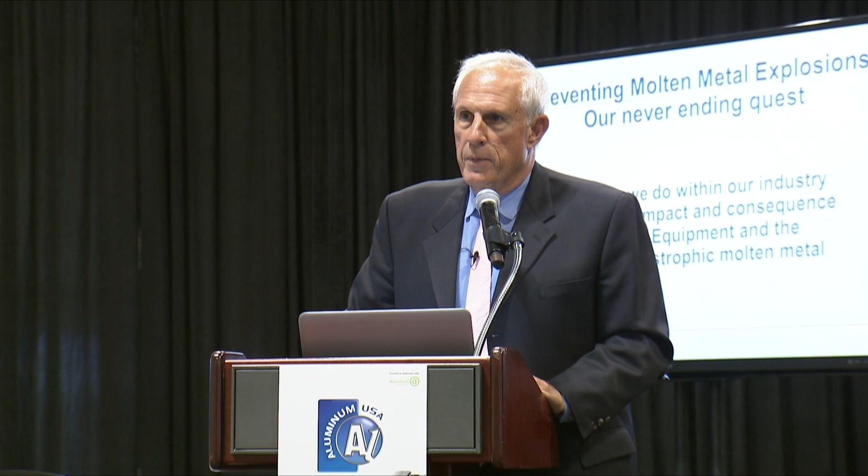Yeah, I think that's very true, and I'll explain. 50 years ago, this event happened. You can see the massive destruction at the casting complex. 4 people were killed instantly, 1 later. A catastrophic event. So you ask yourself, can that happen today?

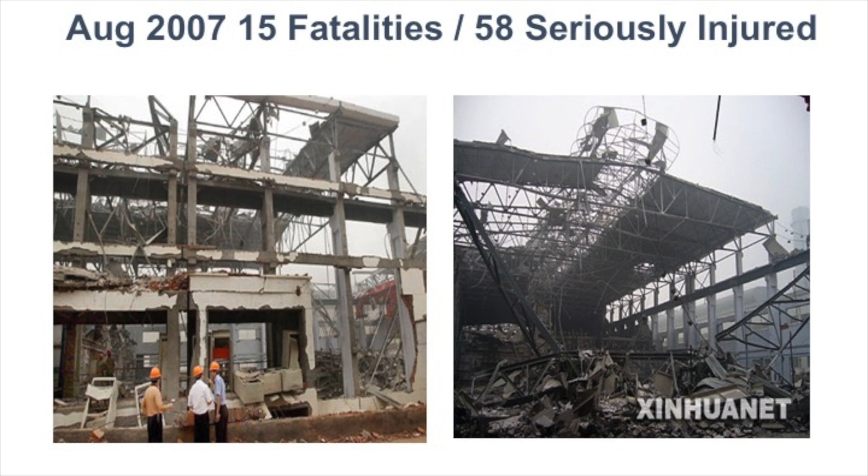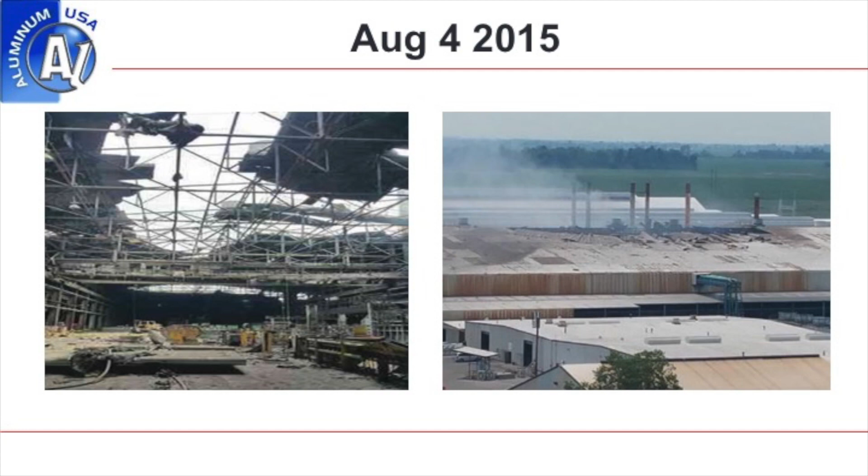Just 10 years ago, 15 cast house workers were killed and another 58 seriously injured. More recently, August 4th, 2015, a massive explosion at a cast house. You can see the massive structural damage. Fortunately, no one was injured significantly and no deaths in this event, but you could see the potential.

And then just over a year ago, another significant explosion without serious injuries, but obviously serious impact to property, equipment, and the business. Fact number 2: preventing molten metal explosions is the Aluminum Association's number 1 safety priority.

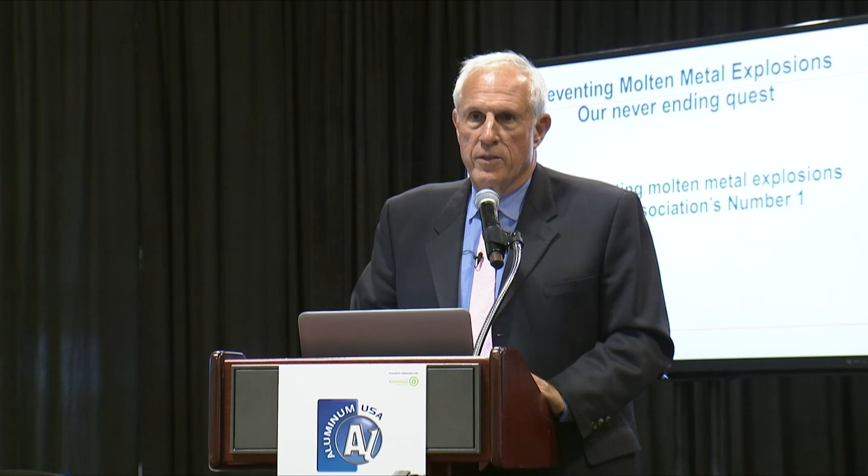Tremendous focus, effort, and energy is applied by the association in pursuit of explosion prevention. So within the association, that's the number 1 safety priority, and it's an absolute must.

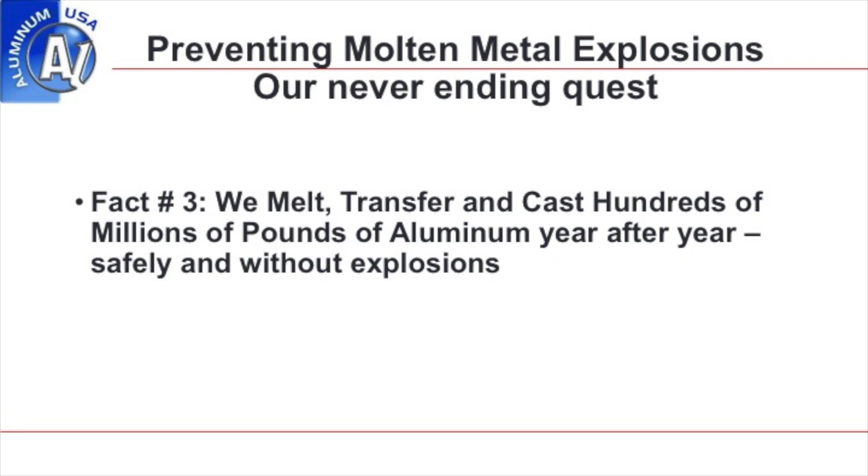Fact number 3: we melt, transfer, and cast hundreds of millions of pounds of aluminum year after year safely and without explosions. I'll give you an example.

This example shown is one member company's data, but is really representative of almost the entire industry. We'll share the raw data for explosions shortly, but this slide represents one company's data over a 10-year period, looking at millions of pounds produced — in other words, exposures considered here. As you can see by applying exposure, pounds cast, explosions are indeed rare events.

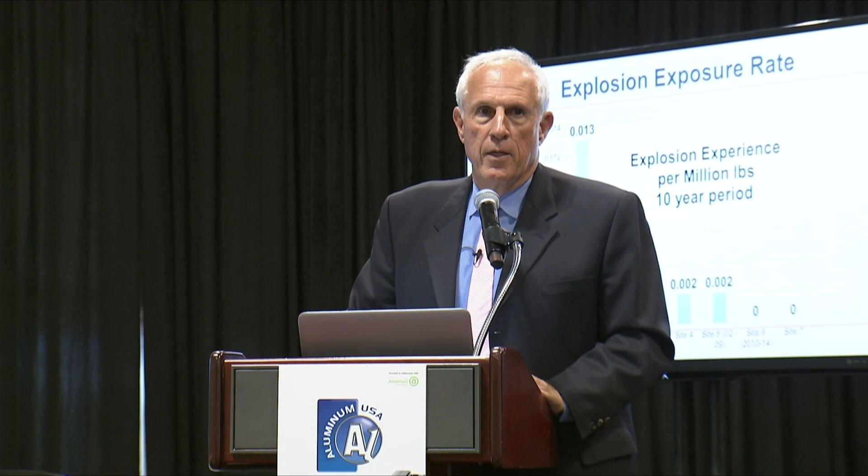The average explosion rate of this company is 0.003 per million pounds cast. So even though we have these significant events with severe consequences, the industry as a whole, when you think about pounds cast per million pounds cast, is significantly low.

Another situation we have, of course, is with injuries. In this case, it's the OSHA recordable rate. If you look at the blue line, that's all manufacturing within the United States. The red line is the Aluminum Association member companies. So in this 12-year period, you can see that we've reduced injuries by 37%.

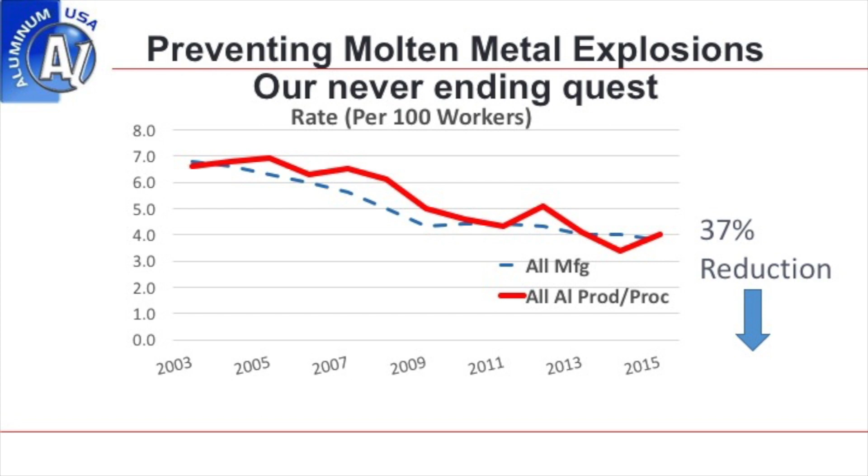Fact number 4: industry experience tells us that molten metal explosions are infrequent events within the industry, but sometimes with severe consequences. I think you can see by the data I just showed, and the 3 explosions in the photos, that statement is absolutely true.

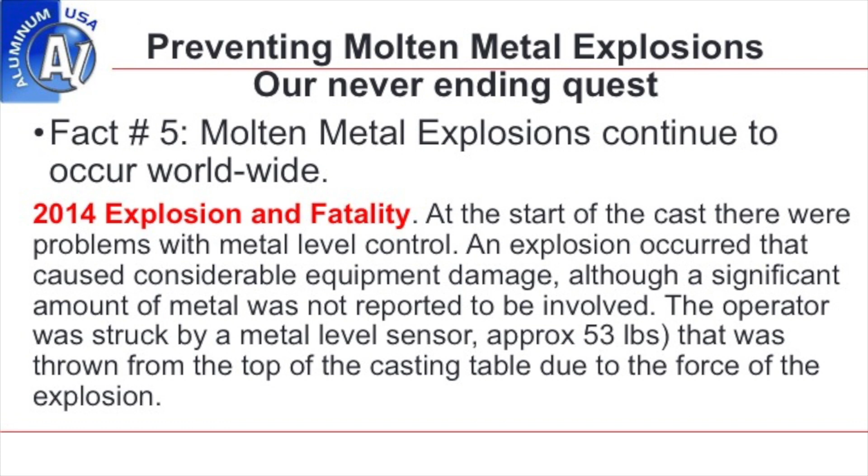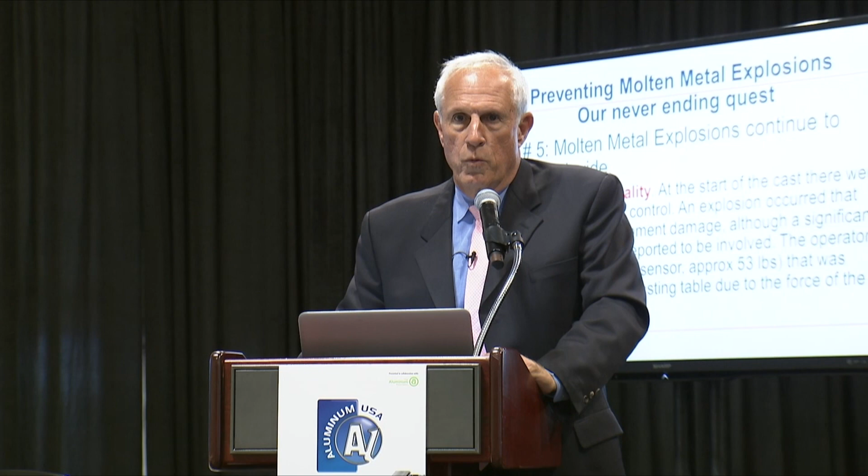Fact number 5: molten metal explosions continue to occur worldwide. The last fatality that we had from a molten metal explosion was in 2014. Before that, 2009 — so we went 5 years without a fatality within the industry related to a molten metal explosion. In this particular case, the force of the explosion sent a piece of equipment toward the operator with such force that it resulted in a fatality.

The point I want to make here, because we're going to talk about it in a little bit, is that it was the start of a cast. So that's important when we talk about casting and the start of the cast. This event, the last fatality, occurred at the start of the cast.

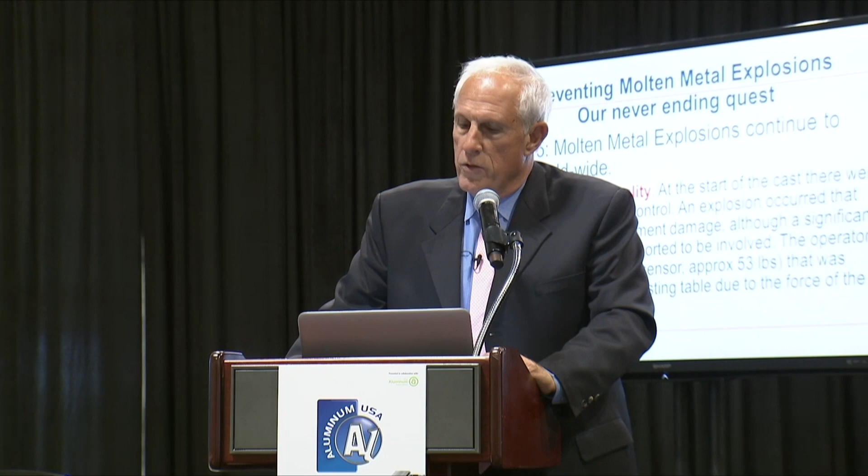Fact number 6: we know within our industry how explosions occur, their causes, why, and how to prevent them. As we move forward in this presentation, I'll be discussing these areas in greater detail.

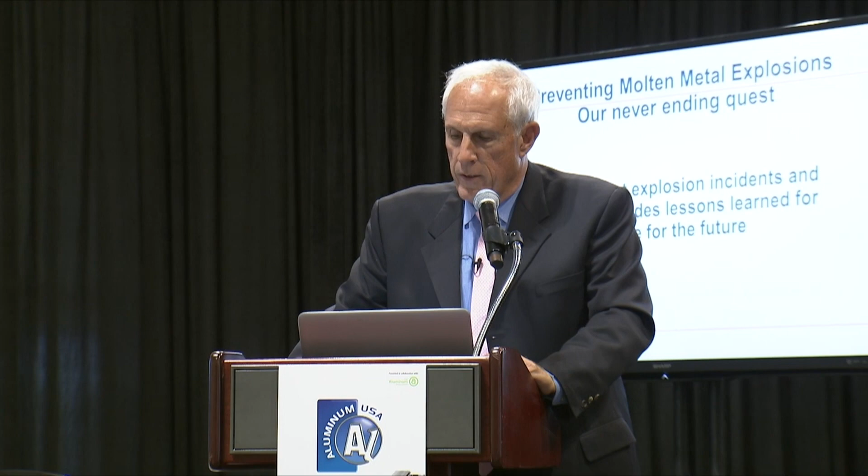Fact number 7: our past explosion incidents and incident data provide lessons learned for today and guidance for the future. As an industry, at our Molten Metal Safety Workshop, we examine past data that allows us to share experiences, learn from them, and create changes, including new internal standards and industry-wide guidelines that will prevent future explosions.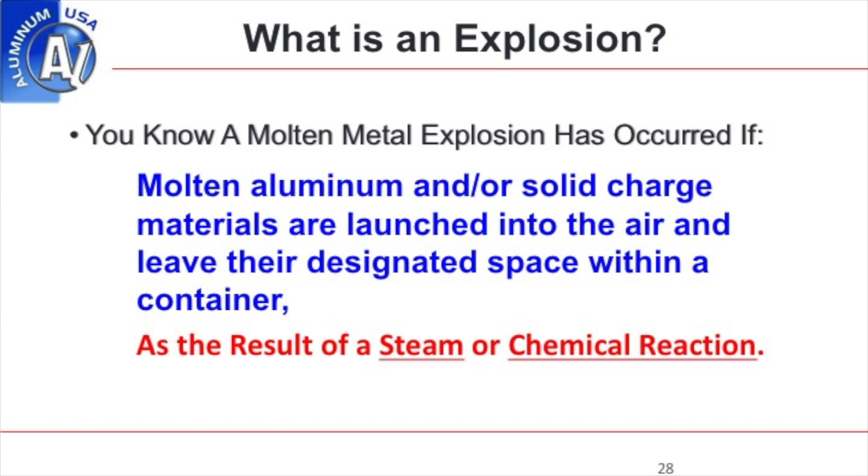So if you think of some of those containers, anybody have any ideas about containers in our cast houses? Furnace, yeah. Drain pans, okay. Yeah, there you go. All those are correct answers.

So when you think of the causes of explosion, we'll talk about steam explosions: water trapped in or under molten aluminum. Also chemical reactions. The first one is really going to be the Force 1 and Force 2, the vast majority. The Force 3 are really going to be that second one, the chemical reactions.

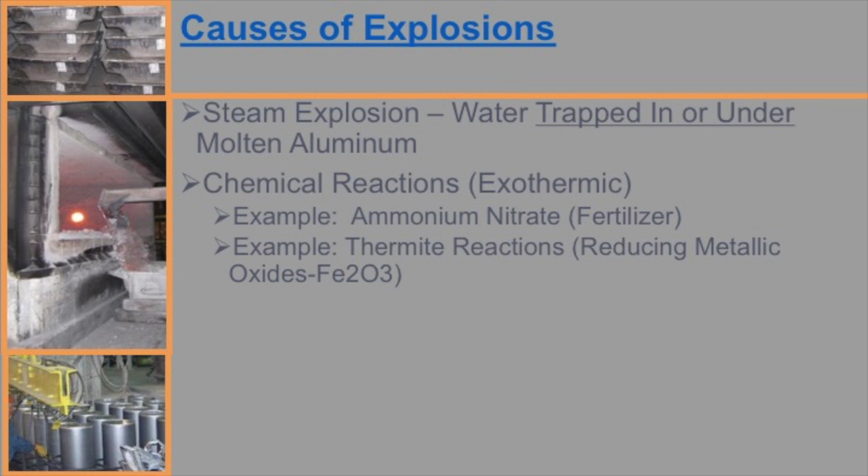And of course we know some of those are caused by ammonium nitrate fertilizer. We know the power of ammonium nitrate. So ammonium nitrate in molten metal is a catastrophic event.

So what causes most molten aluminum water explosions? Steam explosions, water trapped in or under molten aluminum, or exothermic chemical reactions? That's the answer. So most molten aluminum explosions are caused by water trapped in or under molten aluminum.

So this gives you kind of a pictorial view of how that process occurs. Water trapped in or under aluminum superheats. That water rapidly changes from liquid to gas, in this case steam, and expands up to 1,700 times. A steam explosion occurs, spraying molten aluminum in every direction.

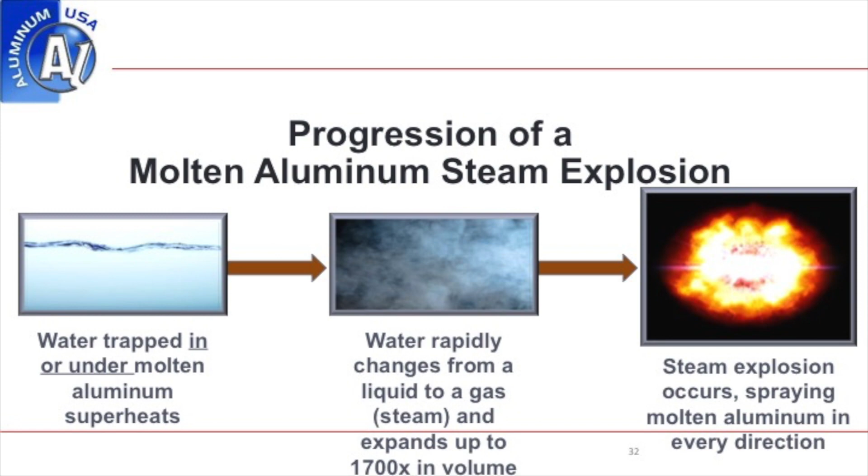It's a steam-caused explosion. What does 1,700 times look like in terms of volume? If you took a marble and expanded it 1,700 times, you get a soccer ball. For some, I know, that's a football, right? Okay.

Anyway, tremendous expansion. What if we have moisture in the sow cavity? What does that look like? Think about that marble in the sow cavity expanding 1,700 times. The pressure's got to go somewhere, right? So you get the concept? Okay.

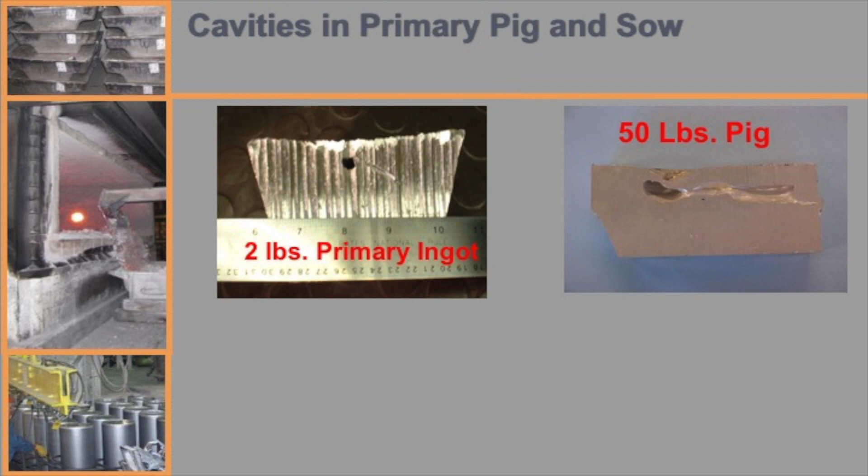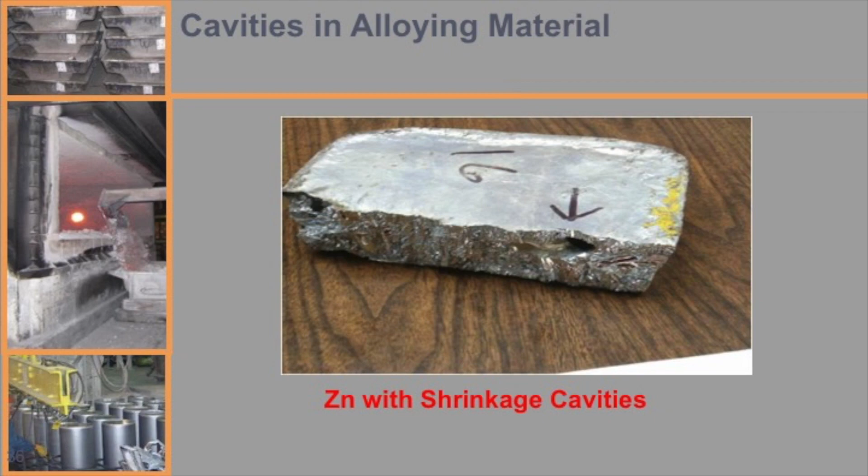So now we're going to talk about cavities that we have to deal with and manage the risk. These are some alloying agents that obviously have cavities and have the potential to contain water, and then convert it to steam if it gets into molten metal. Of course, we have cavities in alloy material too. The same situation can occur.

So again, here's an example. How can water be trapped in or under molten aluminum? We think about a sow with moisture on the surface, or water in a sow in a shrinkage cavity. Which one's going to be more potentially dangerous? Because obviously we know this by experience.

These sows contain up to a gallon of water in one given sow. So think about that 1 gallon of water expanding 1,700 times. This is an important point here because up to this point we really talked about explosions caused by steam, water trapped. The steam-related explosions really account for, and I think I mentioned this, primarily Force 1 and Force 2 explosions.

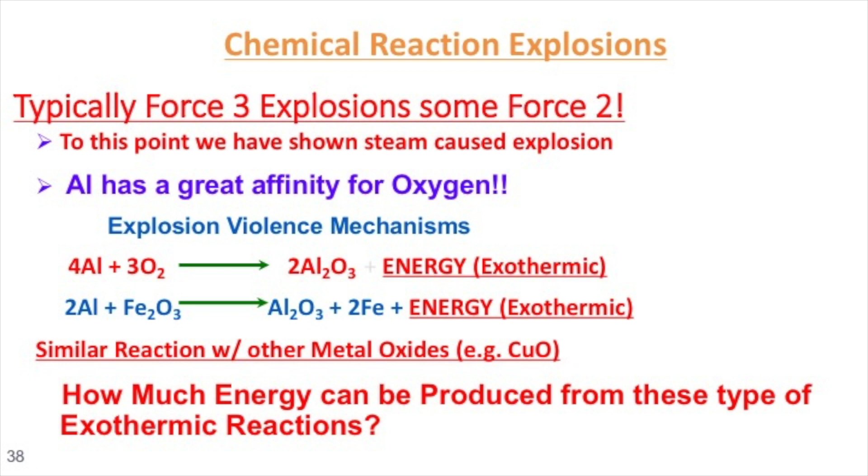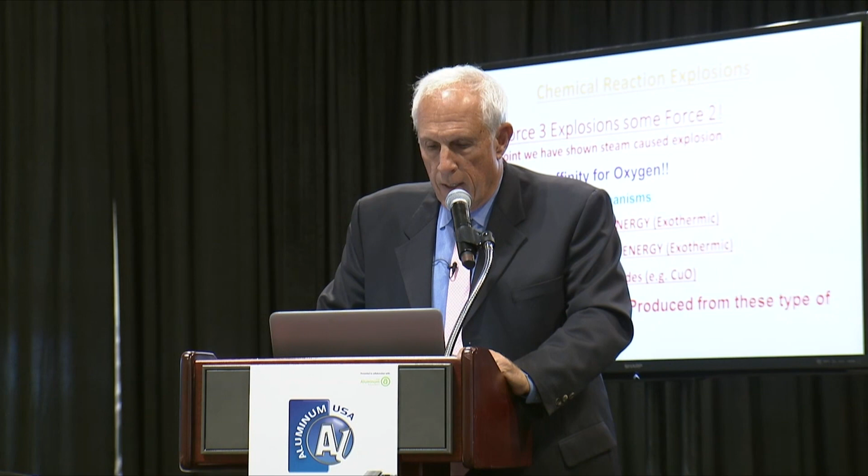However, as we know, aluminum is a very reactive chemical element with a great affinity for oxygen. Just as it requires a large amount of energy to break down the aluminum-oxygen bonds and produce metallic aluminum, that energy will be released if aluminum is able to recombine with oxygen, whether in water or air. So that's this exothermic reaction you see resulting in this.

If you think about it, it's been estimated from a thermodynamic standpoint that the release of energy of 1 pound of aluminum fully reacting with oxygen is equivalent to detonating 3 pounds of TNT. So you get a perspective of how violent that can be if aluminum is able to react with oxygen in either water or air.

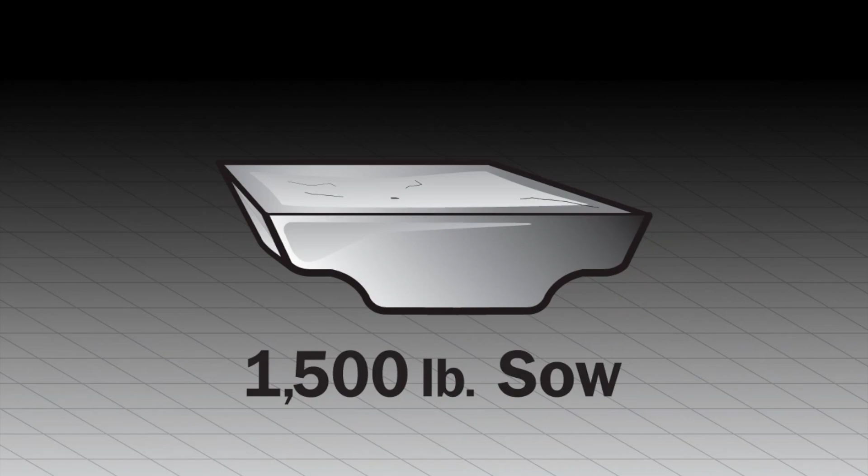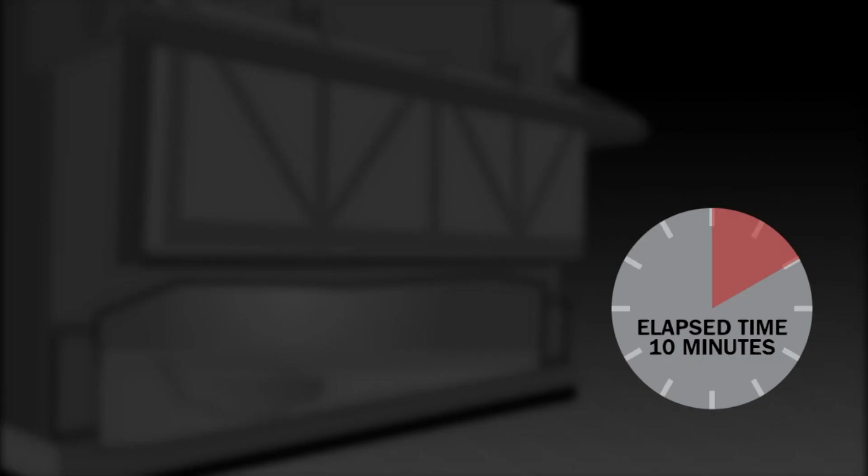This next animation illustrates what would be the likely outcome if a 1,500-pound sow with an internal shrinkage cavity containing water was placed into a furnace with molten aluminum. First, the sow would become submerged beneath the molten aluminum inside the furnace. The molten aluminum would freeze on the sow's surfaces, essentially sealing the sow and trapping the water inside.

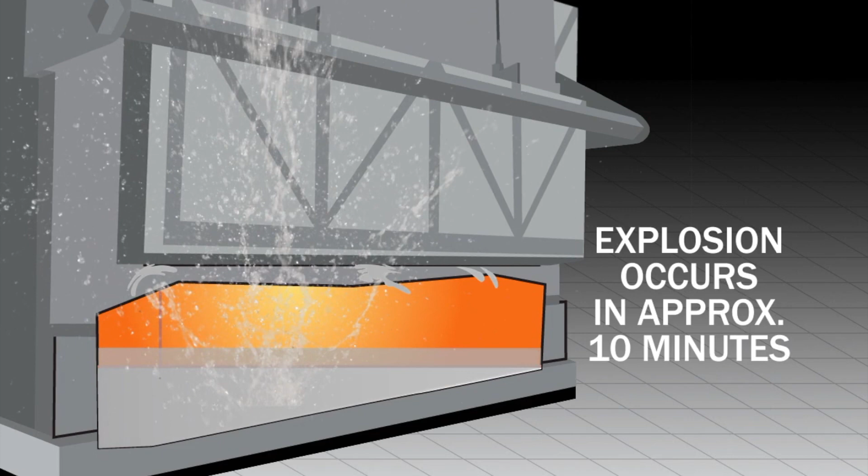The trapped water eventually turns to steam and pressure develops within the sow cavity. Somewhere around the 10-minute mark, an explosion occurs, likely in this case a violent explosion. We know this based upon past explosion events involving submerged sows with cavities, that a 10-minute elapsed time is generally what it takes for an explosion to occur in these circumstances.

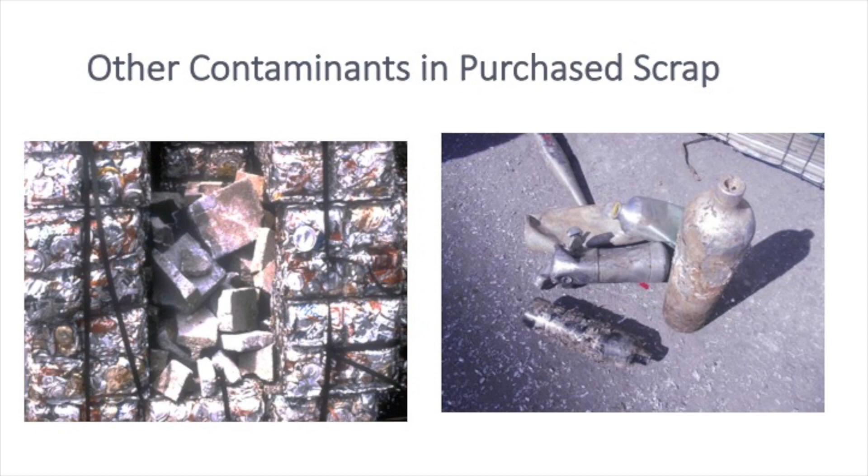Other contaminants faced as an industry in charged materials. So foreign materials in the furnace cause a lot of problems besides safety, but also a potential for an explosion. Another situation, we talk about steam explosions, water on starting blocks, bleed outs at the start of the cast, wet, drain, and skim pans.

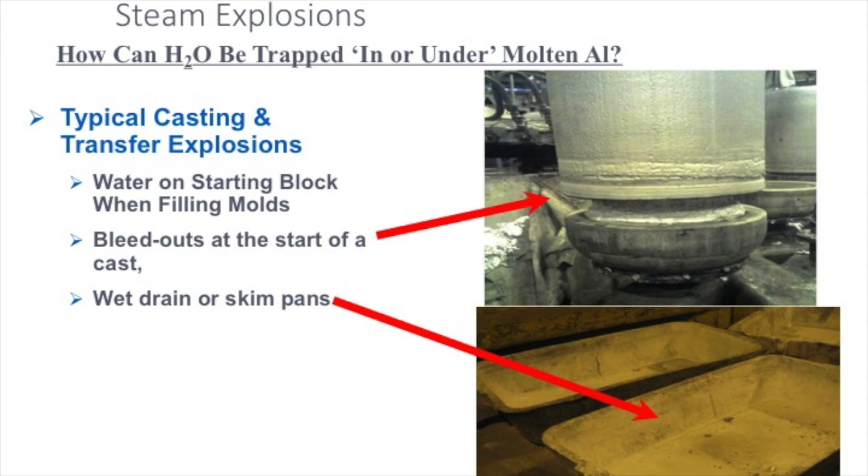So just to cover some explosion research. So we know what happens on these events, but the industry started in 1949 to 2001, did a tremendous amount of research on molten metal explosions and really helped develop an understanding regarding what promotes and prevents explosions. So we know what causes them and we know how to prevent them based upon that research. And so some of, or all of actually the protective coatings used in our casting pits today came out of that explosion research.

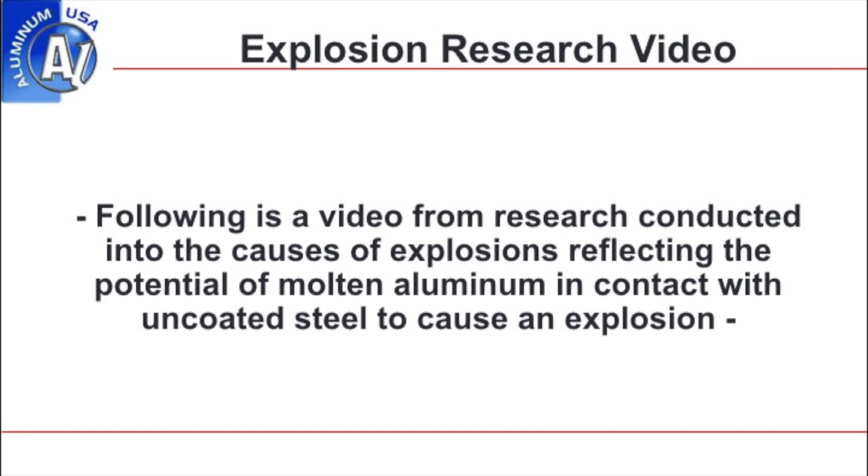The following short video clip shows you the test method used to evaluate coating effectiveness in the prevention of molten aluminum explosions. The testing was conducted at the Alcoa Tech Center under strict control conditions, applying multiple safeguards to protect all participants involved in the testing. In this explosion test example, 50 pounds of molten aluminum is dropped into a 1-foot square steel container with approximately 6 inches of water inside. In this clip, the container is not coated with protective paint. Other videos in the series of testing show the results of both coated and non-coated containers. I encourage you, if you've not already done so, to watch all the testing so you understand the importance of protective coatings.

50 pounds of molten aluminum is safely transported in a temporary crucible and poured directly into a crucible at the testing apparatus. Once the technicians are safely out of the area, the cover protecting the steel container is pulled away and the metal above is dropped directly into the container containing the water. As the video shows, there is an immediate and violent explosion as the molten aluminum traps the water on the uncoated surfaces of the container.

As you can see, the crucible on the test apparatus was blown away and molten metal was thrown from the testing area to the surrounding fence line over 50 feet away, catching the grass on fire. Explosion test videos are available from the Aluminum Association and are highly recommended for individuals that work within your cast houses.

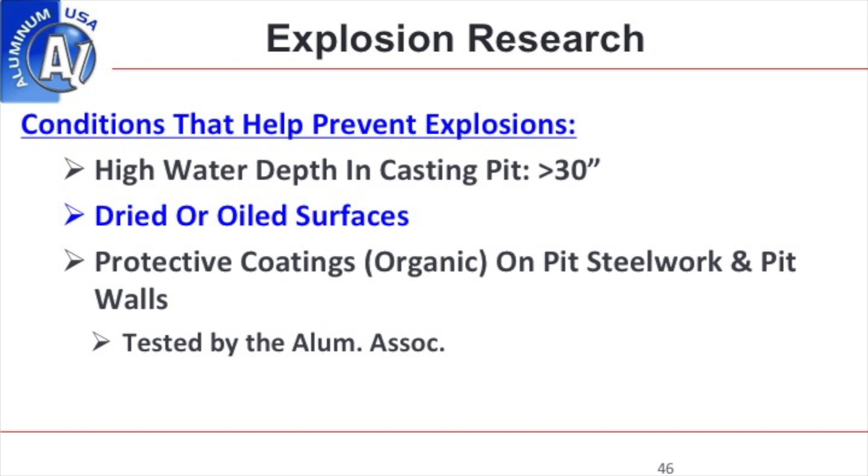That was easy. All right, these are the conditions that help prevent explosions. So high water depth in pits. So we always want water depths greater than 30 inches. Dried or oiled surfaces, protective coating. So we always want protective coatings approved by the Aluminum Association on our pits because we know in order to prevent explosions, we have to have those coatings in place.

I want to cover 3 critical processes: melting, metal transfer, and casting. Which of the 3 cast house processes we know have the most force 2 and force 3 violent explosions? What would you suspect? All right, good. Melting was number 1. And that's what the data says.

So when we look at all those explosions reported, 3,535 within the association, we see that force 2 and force 3 explosions within melting were the most severe. We certainly have force 2 and force 3 in other processes, but they're more prevalent in the melting operation. And you can see how that can occur in our melting furnaces.

Which of these 3 cast house processes do we have the most injuries as a result of explosion? Melting, transfer, or casting? It's in casting. Why would it be in casting? More people around, exactly. More exposure, okay? We tend not to have a whole lot of people in charging. We should never have a lot of people involved in the charging area, right? Good. And one of the things, of course, we have more injuries in casting, but a lot of advances are occurring in hands-free casting, so we're getting rid of that exposure, and over time, that number will be definitely down.

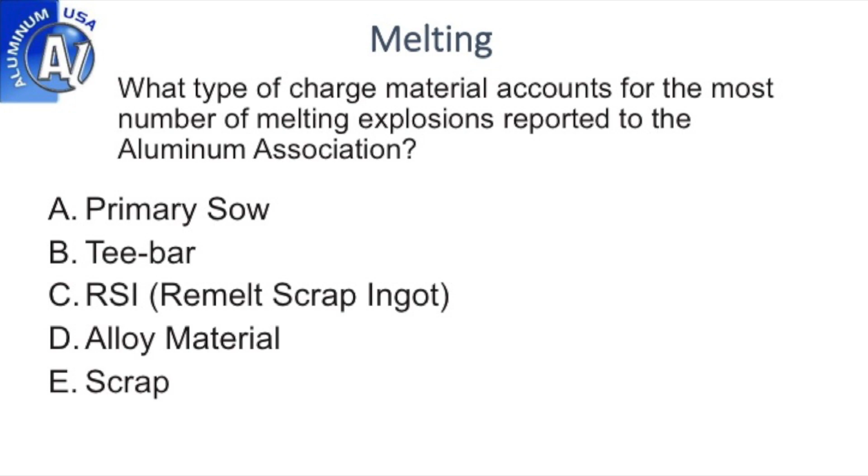Which type of charge material accounts for the most number of melting explosions reported to the association? So the charge material that we put in our furnaces, what would you suspect? Scrap, okay, all right, good, excellent. If you look force 1, force 2, the first thing, scrap, way out in front of everything else. And you can see wet surface scrap, trap moisture within scrap, huge potential.

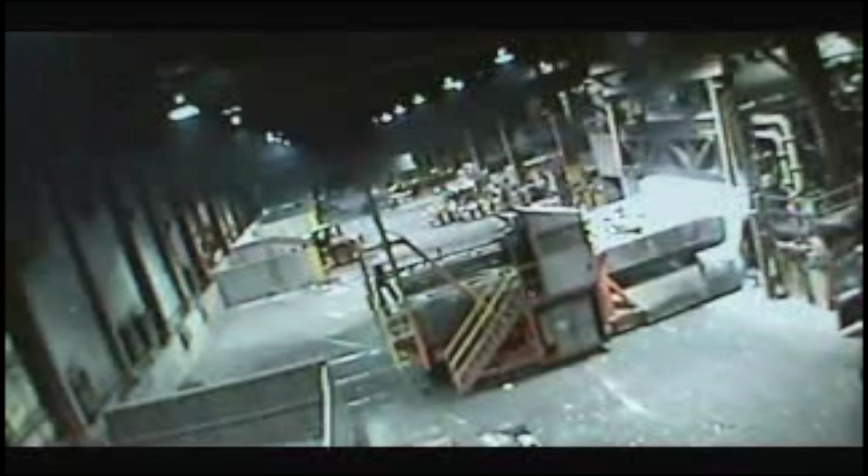All right, well, here's a video, it really scares me. So here's an idea. We charge in a furnace, here's a charge car. Watch what happens. So materials going into our furnace, very dangerous potentially.

Pretty significant, huh? Yeah. Think that might be combustible dust? Could be, right? Another hazard. Different subject, but another hazard.

So just some key points as we think about protective measures, protective systems, safeguards. In terms of melting, metal purchasing, inspection, and storage are critical. Those are really the first line of defense: specifying the material you expect to get in, making sure you inspect it thoroughly before it comes into your cast house. And where you store it is very important.

All materials in your cast house need to be stored away from outside walls where they can get contaminated and wet. And if you dry materials—we have to dry salt, we have to dry alloys—those need to be marked with a time-stamped date, so if they're sitting, they don't go into the furnace, because they can collect moisture and the hazard will reoccur.

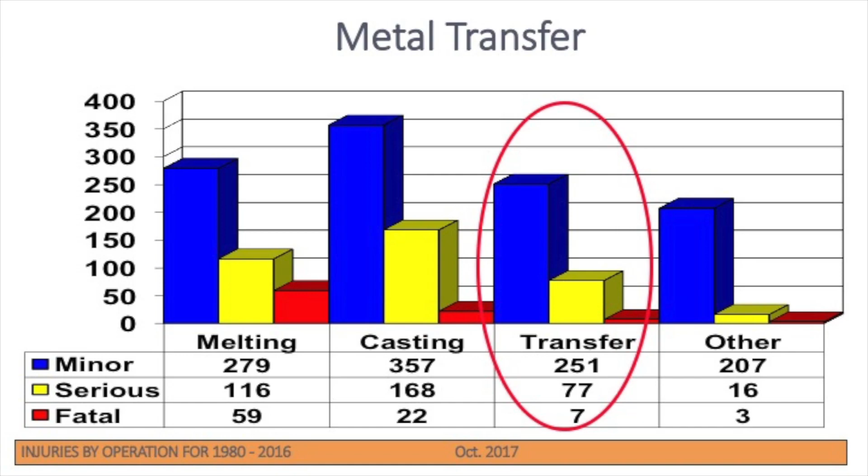Let's talk about metal transfer. You can see from a force standpoint that may be surprising, but we still have catastrophic type explosions during transfer. So it's not just in melting, not just in casting, but also in transfer. You might see injuries and fatalities, which may be a surprise, but people get injured in the transfer process because they're typically around the transfer units in the trough.

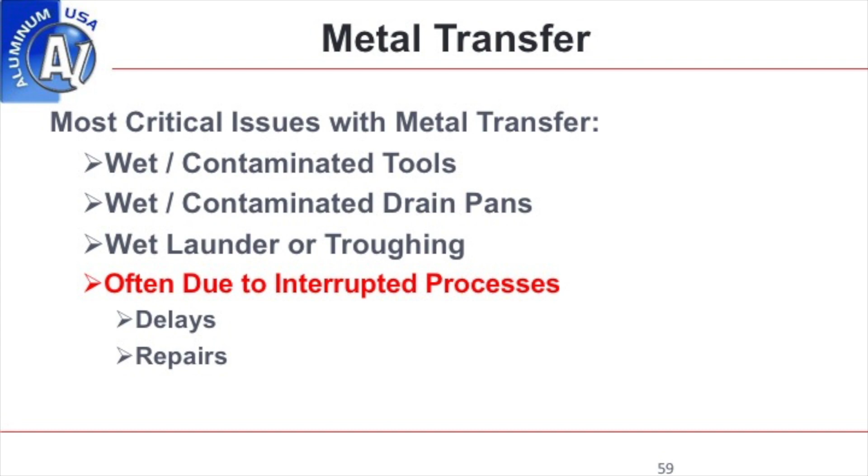Some really critical things here—I'll show you photographs and examples—but we see wet contaminated tools, drain pans, wet troughing. Oftentimes these situations happen because of delays in the production process or repair. That should be a red flag for everybody. When we talk about transfer, we should be thinking about when delays occur and when repairs occur, because that's when these events can and have occurred in the past.

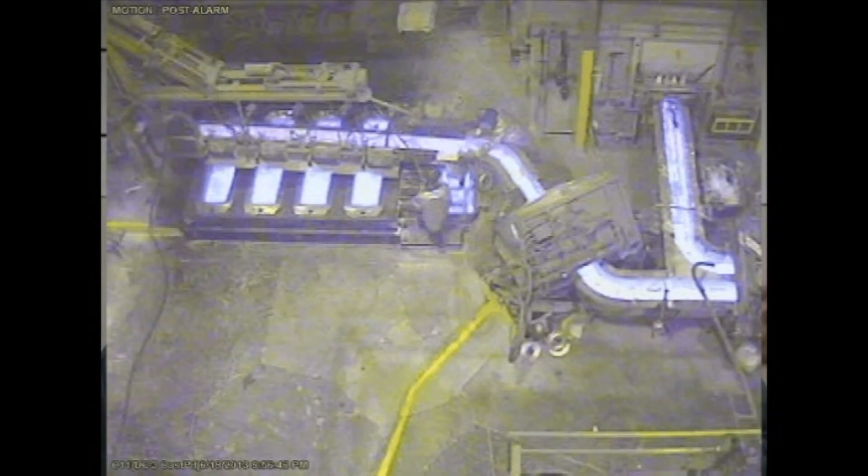This is a drain pan explosion—I talked about drain pans. Watch this event: a force 2 explosion from water in a drain pan, molten metal trapping water.

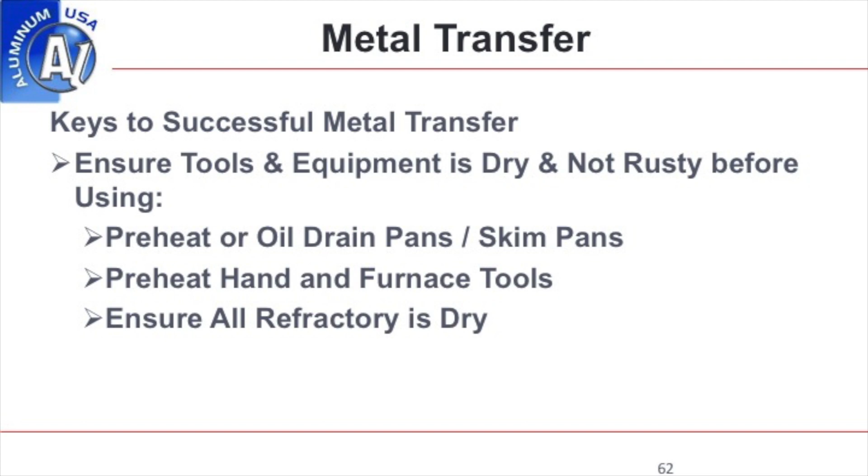As you might expect from seeing those two videos, the key to success is making sure our tools and equipment are dry. In terms of drain pans, we've got to make sure they're dry or oiled. We want to preheat furnace tools and hand tools before inserting them into molten metal, and make sure all the refractories are dry.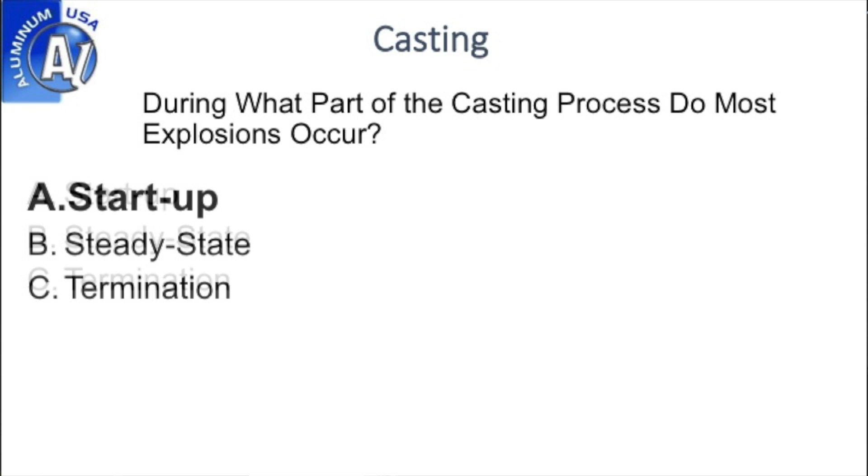Lastly, casting. There's the force distribution in casting—we see primarily force 1, some force 2, a significant amount of force 2s, and of course some force 3s. Look at casting injuries—significant, because people are around. During what part of the casting process did the explosion occur? I kind of queued you up for this one. Yeah, startup. The last fatality within the industry was a startup.

There's the distribution. So when you're thinking about being in a cast house, if you're a casting operator, you've got to do all the right things up front. But again, if you're visiting the cast house, you don't want to be in there during the startup process—the most dangerous time to start up.

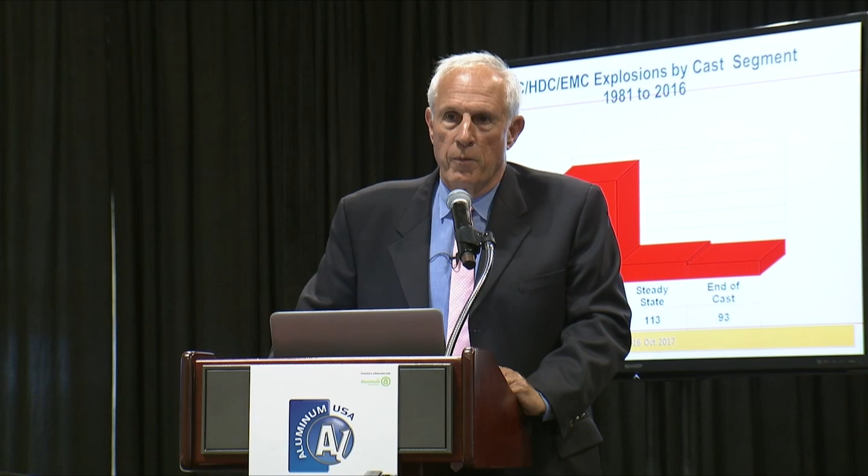All right, start of a cast. Watch him pull the dams, watch what happens. One of the good things here, as we share within the cast house—look at the PPE they're wearing. They're maxed out in terms of PPE, so they know the exposure is high, they know this is a potential, they know startup is an issue. You see that explosion? Yeah.

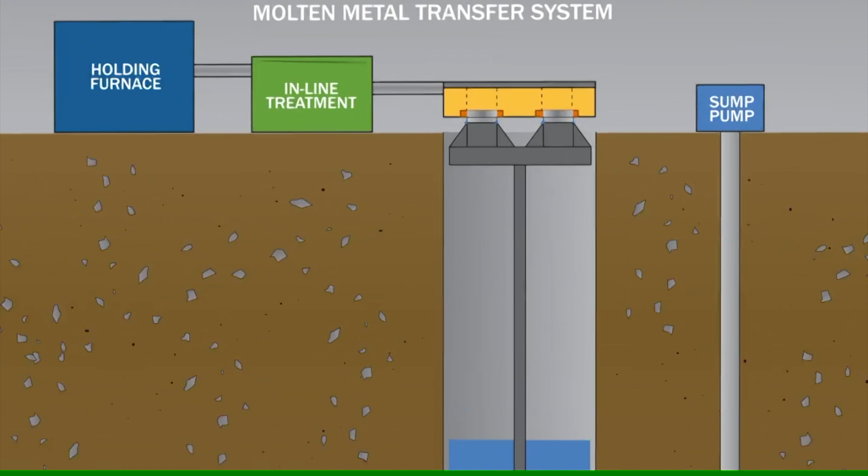This is a hang-up resulting in a bleed-out. This is kind of a graphical depiction of what happens—I think it hangs up in the mold. Do we have that periodically? Yeah, not often, but periodically.

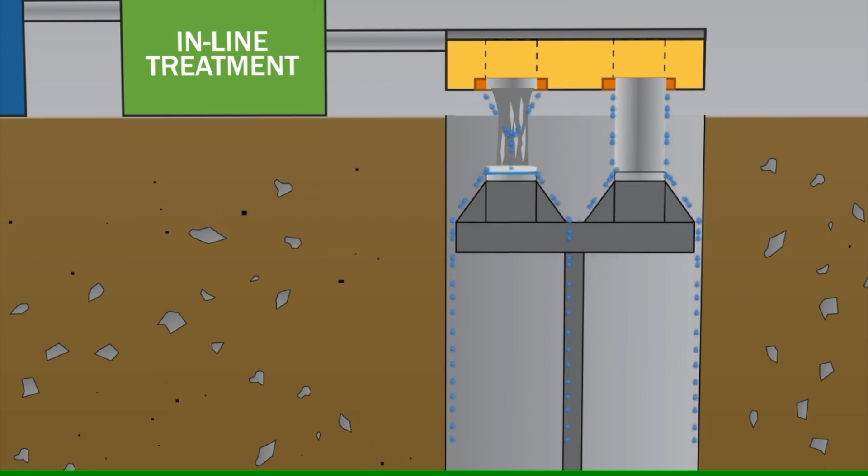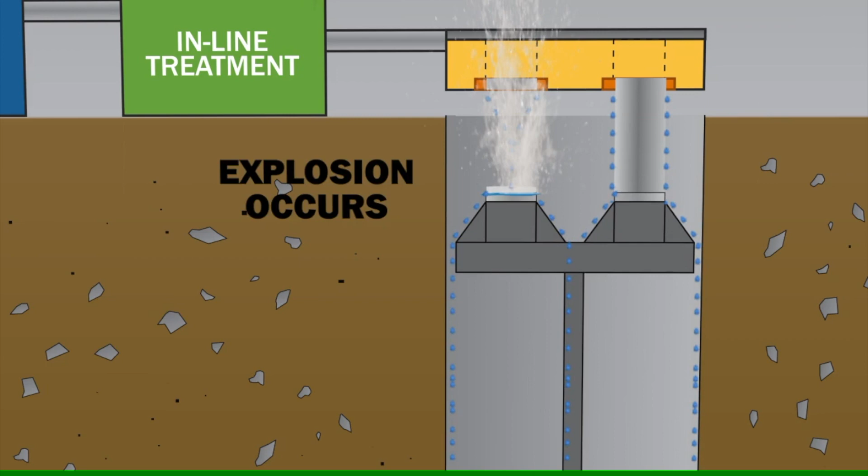Cooling water's on the starting block. See the metal coming down into that starting block after it descends. That water's trapped in or under molten aluminum. What's going to happen? An explosion occurs—could be force 1, could be force 2, and in these situations we've had force 3s in the industry.

And here's the force 3. Here's an example of a force 3. No fatalities, but look at the position where they're at in terms of the casting table. Okay, 3 serious, critically serious injuries.

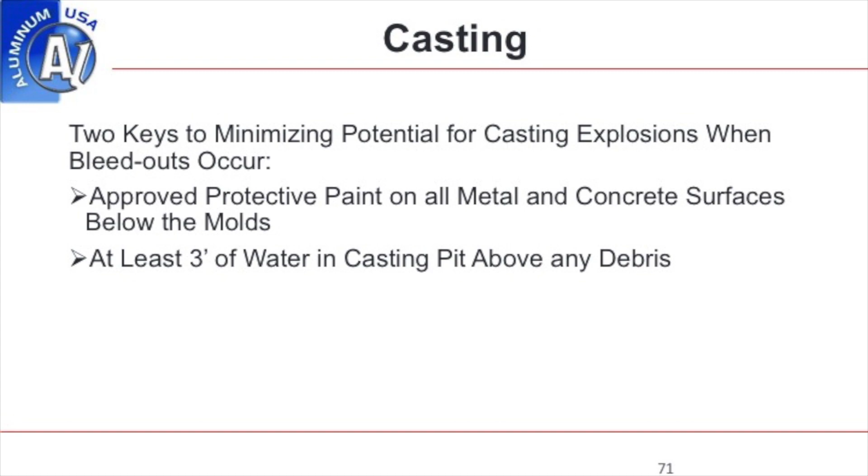So 2 key ways to minimize potential when casting explosion bleed out occurred. Of course, we want to make sure the protective paints are there, and at least 3 feet of water in the casting pit. Very, very important in protective systems to prevent massive explosions.

So how do we manage the risk in the casting process? Of course, we have to eliminate all sources of moisture, starting with tools and refractory. So the tools and refractory materials we use in casting, we got to make sure are clean and dry. We need to eliminate all the opportunities for bleed outs and hang-ups.

So the 2 most critical hazards we have in casting are bleed out and hang-ups, and we manage that with equipment condition. You have to start with equipment condition, then your practices and procedures in terms of casting, and make sure your protective systems are in place, namely protective coatings and emergency water.

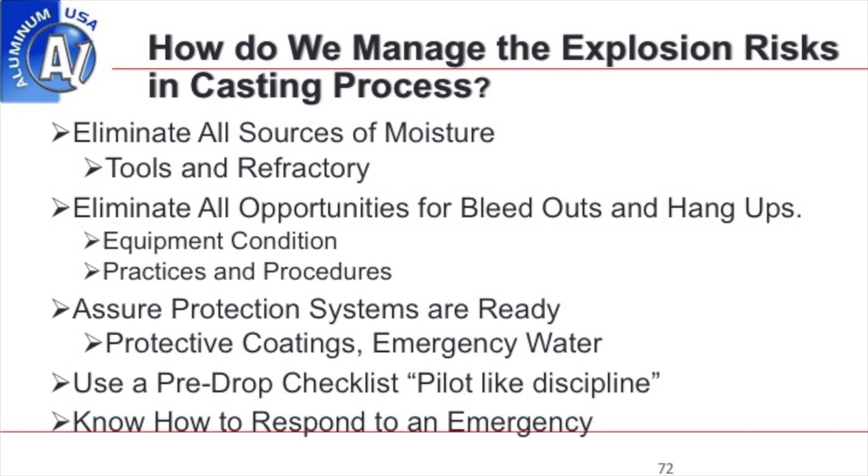Everyone needs to do a pre-drop checklist, with pilot-like discipline, just like you're flying a plane. That's how critical it is. And if all that fails, and it shouldn't, you need to know how to respond to bleed outs and hang-ups, so you can deal with those emergencies safely without putting people at risk.

Here's where it all started for me, back in 1983. I wasn't there, but there was a lot of industry focus when this event occurred. What happened was there was a bleed out, molten aluminum occurred, an explosion occurred, people in and around that casting table, and molten aluminum went into the air a long ways and set their clothing afire. There were 5 fatalities from that event alone.

That should never happen in our industry again because of the protective clothing we wear. So there's what we should be wearing - everybody in the cast house needs primary and secondary clothing, with the primary clothing for doing the critical tasks.

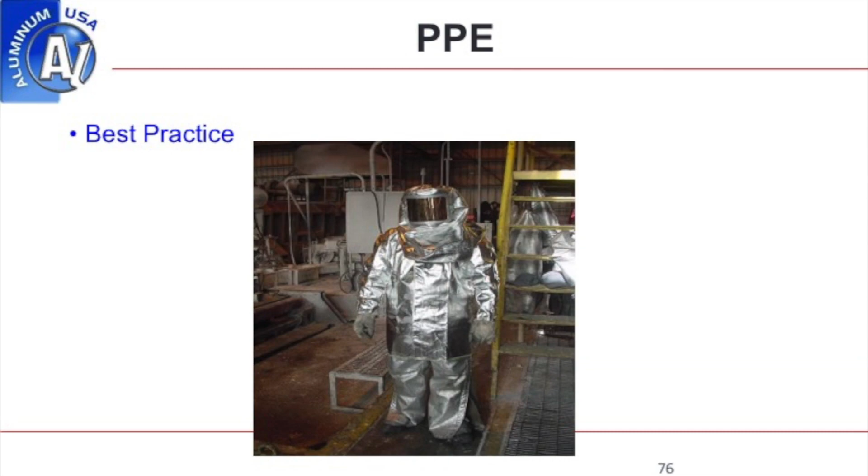Some examples I showed you were people wearing primary clothing and doing those critical tasks for maximum protection. That's what it looks like - everybody has a similar variation of that. Most plants use either this or Zirpro wool, for maximum protection during critical tasks.

So there's what it costs. When we outfit a worker in this clothing, it's basically $1,070, in and around that amount. But is it worth every penny? Absolutely, it's worth every penny - every penny we spend on prevention as an industry, and every penny we spend on personal protective equipment.

Why all of this effort to prevent explosions? Several reasons - first and foremost, worker safety, and business viability. You can see if we don't prevent catastrophic type explosions, what can occur. Customer confidence can be affected - we can't deliver their product to their location because our cast house is disabled.

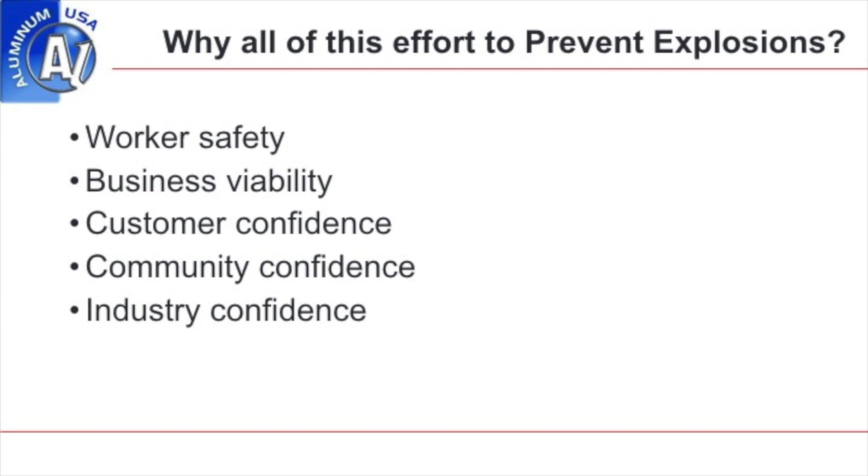Community confidence - we all do business in a community, and it's important that people know what we're doing in our operations is safe - and industry confidence. So it takes all of us together working to accomplish preventing molten aluminum explosions.

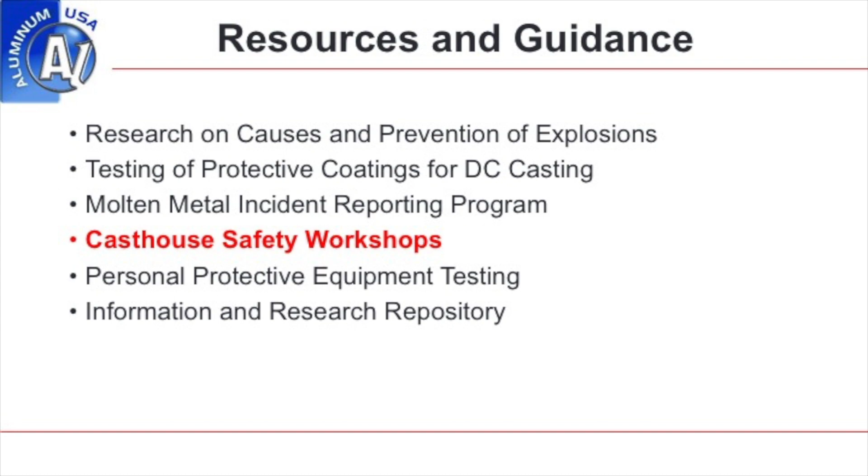Just a couple things from the Aluminum Association standpoint - a lot of resources, a lot of guidance, and just this week, as I mentioned, the Casthouse Safety Workshop occurred, with over 100 people, 108 people, from member and non-member companies, focusing on the prevention of molten aluminum explosions.

Go back to this fact: preventing molten metal explosions is the Aluminum Association's #1 safety priority. With that effort, we will continue to make great strides going forward in the prevention of molten metal explosions.

In closing, I would like to recognize 3 individuals who were instrumental in the preparation and review of the materials presented today - special thanks and appreciation to Ray Richter, John Zay, and Kurt Wells. Overall, I hope you found this session valuable as you go forward within the organization to improve molten metal safety. Thank you.